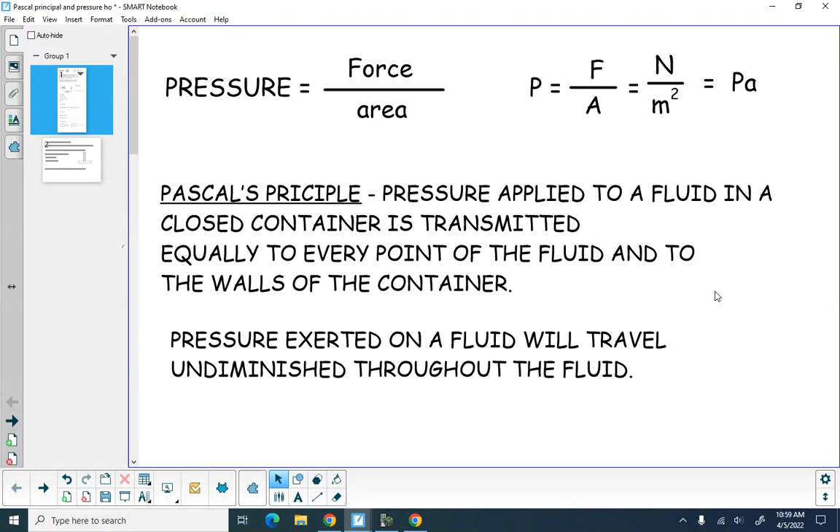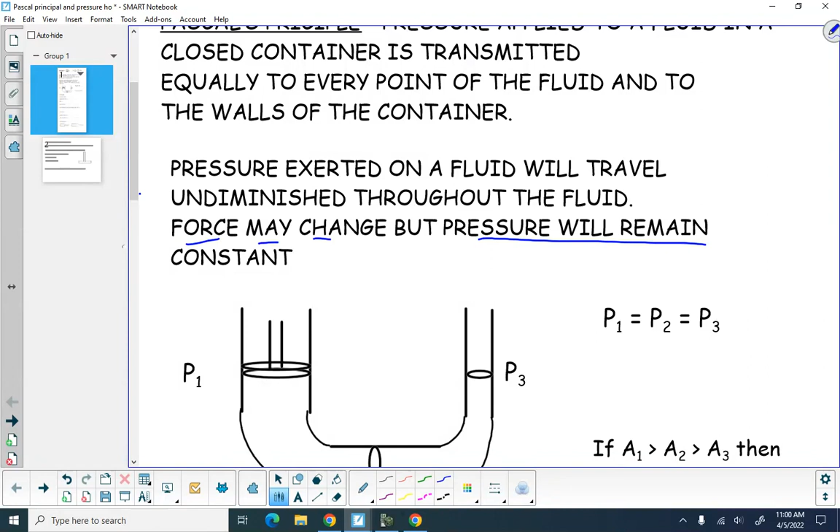Pressure exerted on a fluid will travel undiminished through the fluid. Force may change, but the pressure will remain constant. This pressure that you have will remain constant as you push. Now, mind you, once again, pressure is calculated by force divided by area.

Now, if we take a look at a cylinder here, a pipe system, a hydraulic idea. If I push down on this plunger here, I compress the liquid and I put pressure on the liquid. Once again, pressure is equal to force divided by area. So if I apply a force down on this plunger, you have all this fluid that's in here. I push down on it, I have this area here, and I apply a pressure.

This pressure here, when I start to make my area smaller, is exactly equal, though, to the pressure that is here, that is equal to my pressure here. So my pressure at 1 is equal to my pressure at 2, which is equal to my pressure at 3. My areas, though, are decreasing.

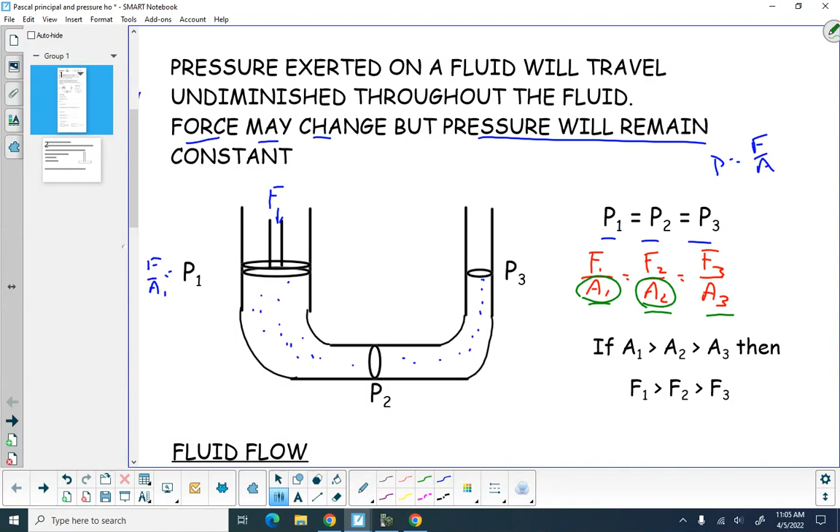When we talk about fluid flow, we can have different types of fluid flow. We have laminar flow, which is like a smooth flowing fluid. You have nice smooth walls, you have nice tapered walls. If it's a nice smooth flowing fluid, this is called a laminar flow. We can also have what is called a turbulent flow, which is a rough flowing fluid.

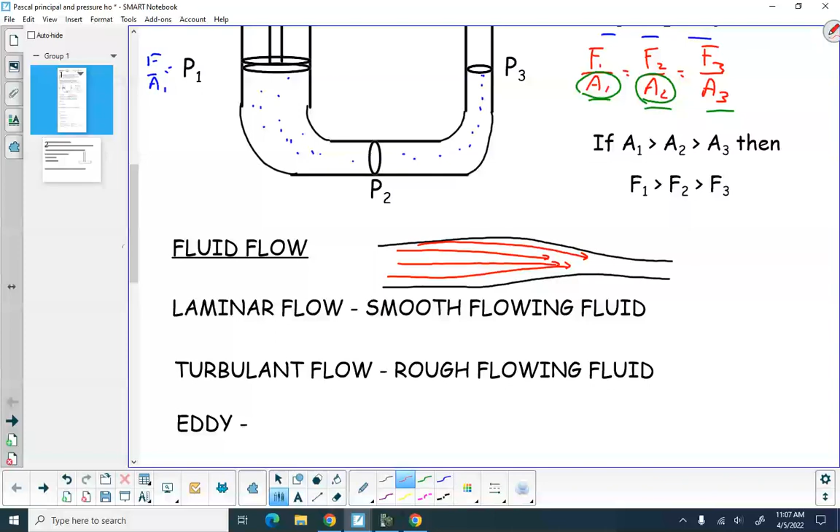This would create a laminar flow because the fluid would slowly and smoothly flow through the tubes. But if I took my fluid flow and put a barrier in there and just shrink it down this way, where you have sharp edges.

If we take a look at the water here or any type of fluid that's going through here, it's going to go in a straight line until you have something that's going to block it. So this water will want to try to continue to flow right through the pipe. But the fluid is going to hit right here. When it hits something, it's going to be like a ping pong or a rubber ball. It's going to bounce backwards. So it's going to hit the wall, and then it's going to want to come backwards.

Well, when it hits the wall and comes backwards, you start getting what is called turbulence. And that turbulence will cause what is called eddies. They are swirls of fluid that are formed in the turbulent flow.

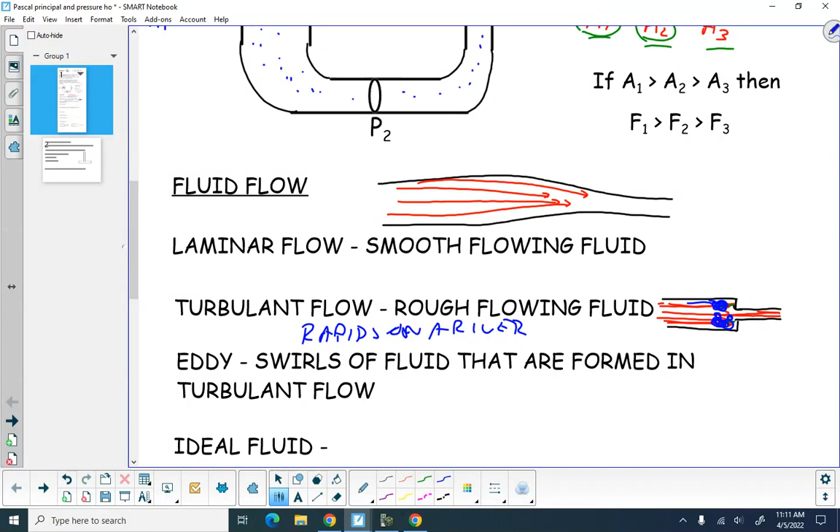So when you deal with the idea of rapids on a river, that's your turbulent flow also. Because what's happening is water's hitting the rocks underneath the water and spinning up and around.

You have an ideal fluid? So like an ideal gas, you have an ideal fluid. A fluid that has no internal friction or viscosity and is incompressible. You cannot compress it down.

Even though, and this is sometimes tough to comprehend because we always feel friction as things that warm up, and you get friction there between your hands when you rub them together. Well, water molecules, when they run into each other, they also have friction. You have friction there. Okay? You have water that heats up a little bit with respect to the friction because you have molecules running into molecules. You get friction there. Ideal fluid, there's no friction that exists between the water molecules as they interact.

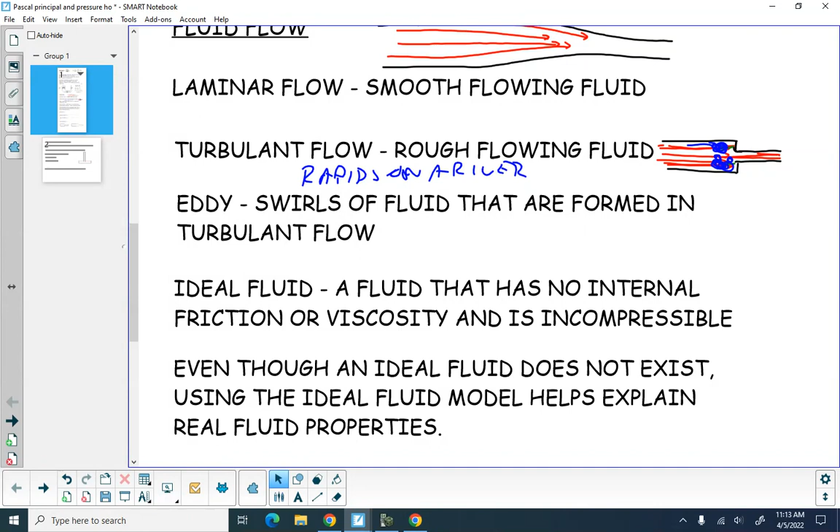And it's like the same with an ideal gas law. Gas is a fluid. Even though an ideal fluid does not exist, using an ideal fluid model helps us explain real fluid properties. It's not going to be perfect. Very similar to the idea that the orbits around the sun are not circular, but we use the idea of circular because it gives us a good ballpark calculation.

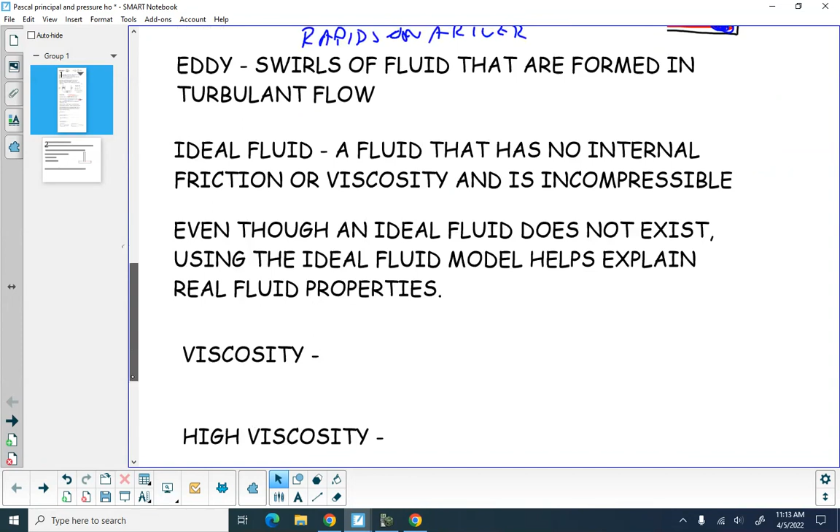We've dealt with friction already. We haven't talked about the word viscosity. When we talk about viscosity, it's the amount of internal friction between molecules of a liquid. The amount of internal friction between molecules of a liquid.

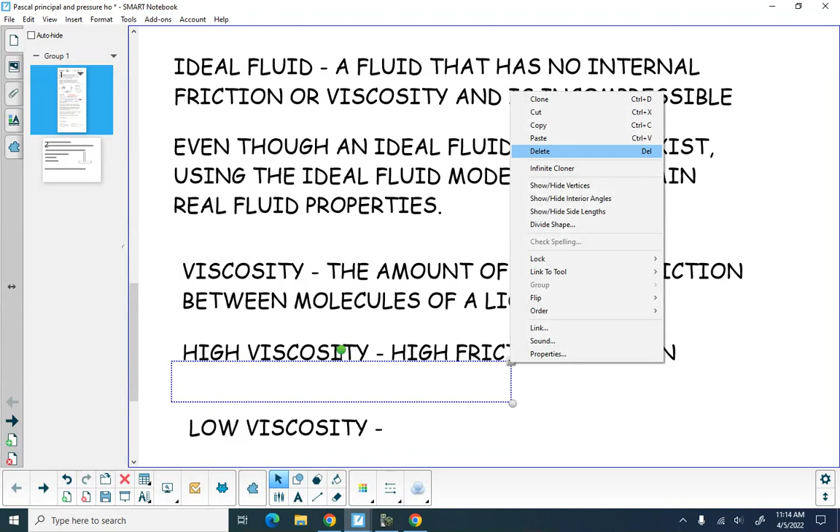High viscosity means you have high friction between the molecules. It's slow flowing. It is like molasses. It is like syrup. It's like new motor oil. It will flow, but if you look at syrup, you look at molasses, it will flow, but it will be very slow moving. It will flow, but slow moving.

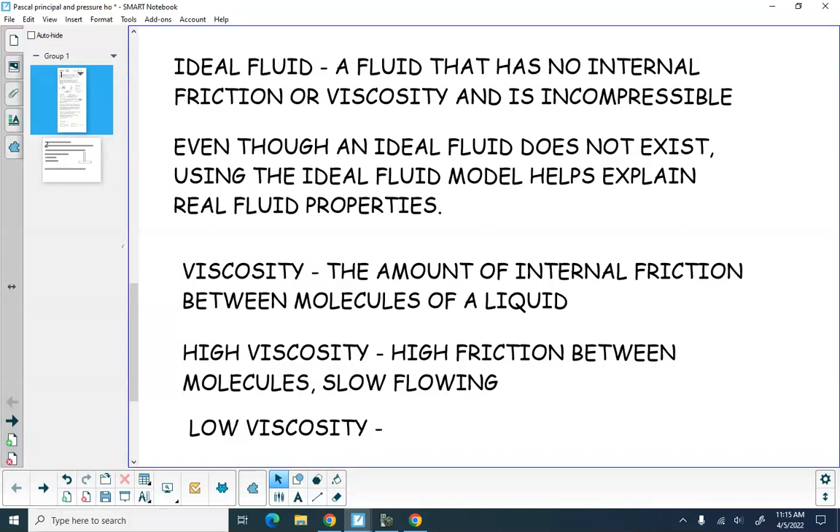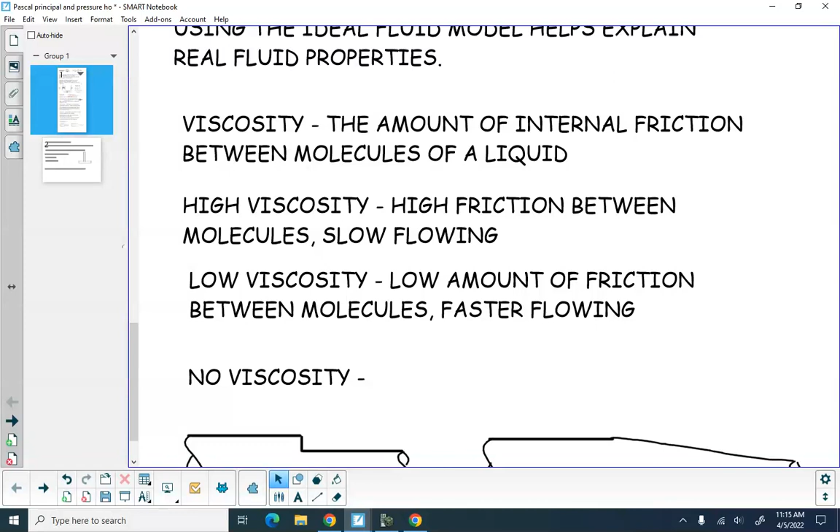Low viscosity, you have low amount of friction between the molecules. It's faster moving. Water would be an example of low viscosity. It flows pretty easily.

And once again, low viscosity, no viscosity, that's ideal, but you're not going to have it. This is your ideal fluid. If you have no viscosity, there's no non-viscous fluids that exist. That's your ideal fluid.

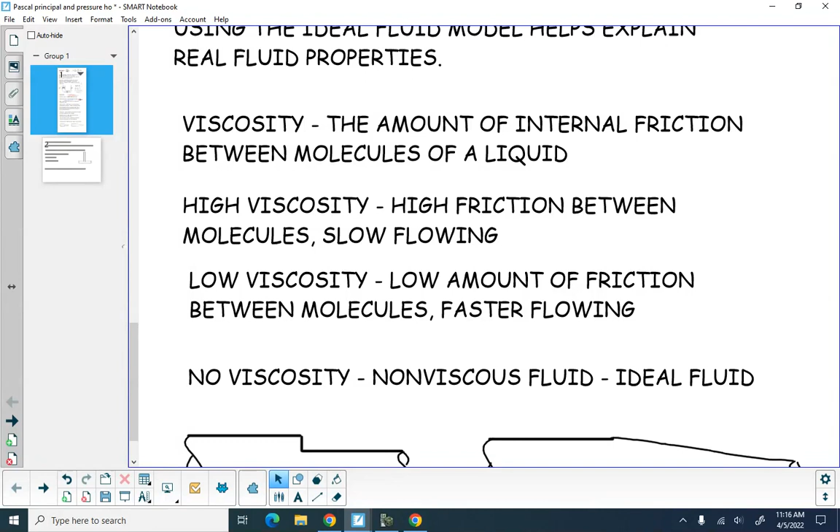And this is the same thing we did up top here. When you have fluid flow here, when you have sharp edges, you're going to get turbulent. These water molecules are going to come here, and they're going to hit here. And once they hit here, they're going to bounce backwards, and you're going to start getting these eddies because they'll start running into other molecules before they start flowing in there. So you're going to get turbulent.

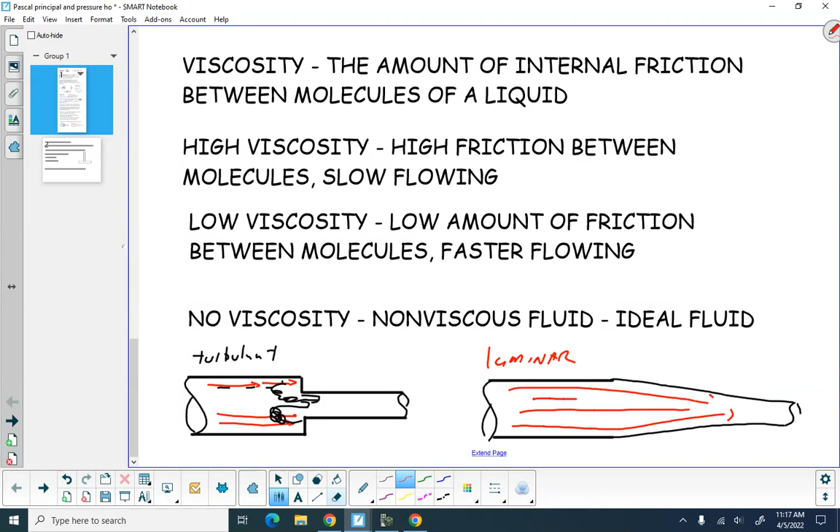Then we have laminar. Where the water molecules are not going to run into any barriers at all. They're just going to nice and smoothly combine together. And you don't get any eddies there. You don't get any turbulence that is there.

Standard atmospheric pressure. Okay, you talk about pressure. We have an atmosphere that applies pressure to us. We don't feel it, but there is pressure that's put on us from the atmosphere. If that pressure did not exist from the atmosphere, what would happen to you if you went into space? Well, you would expand and you would eventually blow up. Okay? Because there'd be no pressure pushing you together and holding you.

Yes, your skin holds you together, but you also have pressure that continues to push on your skin that keeps you compact. If you would go into a vacuum and there would be no pressure in that vacuum, what would happen is, boom, you would make a mess. You would have blood and guts everywhere. Would not be pretty.

Well, a barometer is an instrument that measures standard atmospheric pressure. A barometer measures that standard atmosphere or that atmospheric pressure. What do we have that's pushing on us? There's different ways of being able to deal with pressure at sea level. Pressure at sea level is 1 atmosphere of pressure. 1 atmosphere of pressure is 1.01 times 10 to the 5th pascals, or 101 kilopascals.

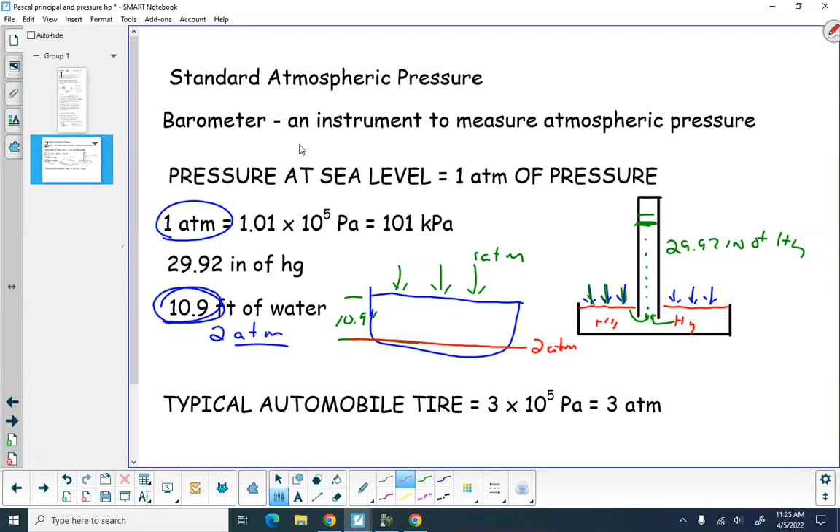A typical automobile tire, we have 36 pounds of pressure that's inside of that. That would be about 3 atmospheres, or 3 times 10 to the 5th pascals, which is about 3 atmospheres of pressure, which is about 36 psi, the pressure that you feel there.

So like I said, if you want to feel what 1 atmosphere of pressure feels like, okay, we know what 1 atmosphere of pressure feels like. We feel it right now. We don't feel anything different. The atmosphere doesn't really feel different to us because this is what we're just used to. If you go down 10 feet, 11 feet into a pool, once again, that's an additional atmosphere of pressure being added to you. And once again, you'll feel it in your head. You'll feel the pressure there. Every 11 feet you go down, you have an additional pressure added to you.

People that are deep sea diving, they have to put on a pressurized suit. Okay? The reason why is because if you go too far, we can handle 10 feet or 11 feet. But you go down another 11 feet, you're really going to start feeling it. You'll feel it in your ears, in your head, your eardrums may bust because the pressure is going to be hard. If you go down 40 feet or 50 feet or 60 feet in the water, that's a lot of pressure that's being put on your body and on your head.